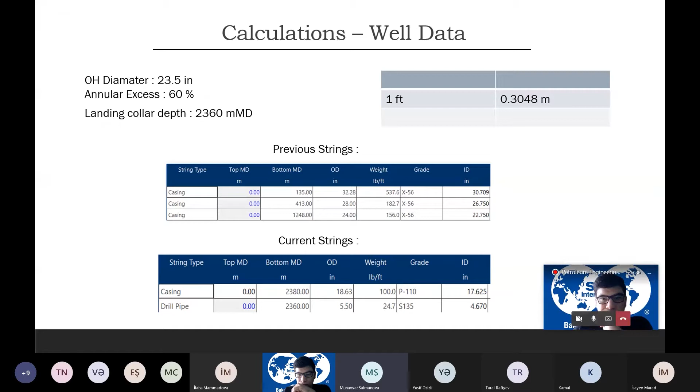Okay, then I will share my screen, and Wagif, please check if you see it when I write down here, because I need to switch cameras. Take a picture or a screenshot of the provided well data and this page, because I will share another hand calculation, and I want you to have both available. Let's see if you see my camera. Please check. I write 1, 2, 3. Did you see? It's in the right order, right? Yeah. Okay.

We have covered primary cementing, and I have chosen one of the actual primary cementing jobs that we have cemented and put the input data here. The objective of this job is cementing of the 18 5/8 inch casing with the inner string method, which I talked about in the last session. The first requirement is for the top of cement to be 200 meters above the previous shoe.

I have well schematics here, but I don't want to show them beforehand, because most of the time they will not provide you a schematic, and you need to take it from text and tables, whatever data has been provided. Requirement: spacer ahead 150 barrels and spacer behind 15 barrels. The questions: capacity of the 5.5 inch drill pipe. With the inner string method we have drill pipe inside the casing, and its size is provided, 5.5 inch.

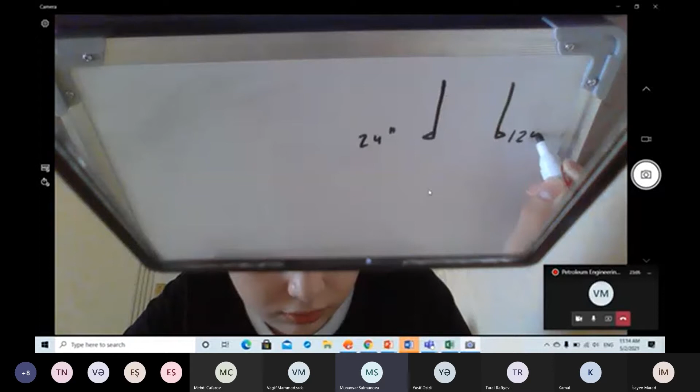Let's say it is 24-inch casing till surface. I will write down here 24-inch. This is the 24-inch shoe. What is the 24-inch shoe depth? We are always using MDs. So it is starting from top MD, 0 meter, to 1248 meter. So I will write down here 1248 meter. And then, what is my current string? My current string starts from surface to 2380 meter. I will draw it here.

I guess in our drilling engineering course in university, they asked us to draw this in the exam, as I remember, or we had some assignment tutorials where we were calculating this. And that was the only thing about cementing in university, as I remember.

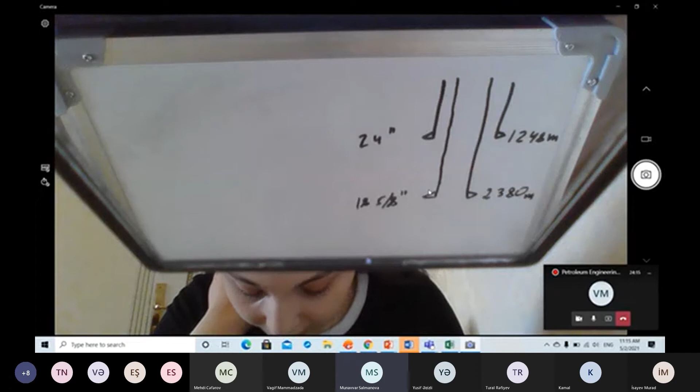2380. And size is 18 5/8 inch. What we have here is the inner string method. For the inner string method, we should have a drill pipe, and it is 5.5 inch. Where is the landing collar? We talked about these plugs and the inner string. We have the landing collars, we have a shoe, and we have already discussed it. That's why I will just directly draw it. Landing collar is 2360. It should be somewhere here.

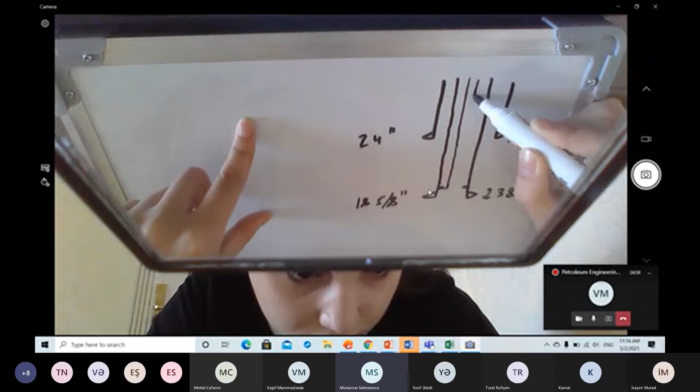What is the depth for my drill pipe? It is just above the landing collar, 2360 meter. I don't want it too big. Let's get it here, this part. It's 5.5 inch drill pipe.

What is our open hole? Open hole is the section which has been drilled and not cemented yet. So open hole will start from the previous casing. We don't care about this open hole because it was already cemented, right? Now we need to cement this section.

I haven't seen orange cement, but anyway.

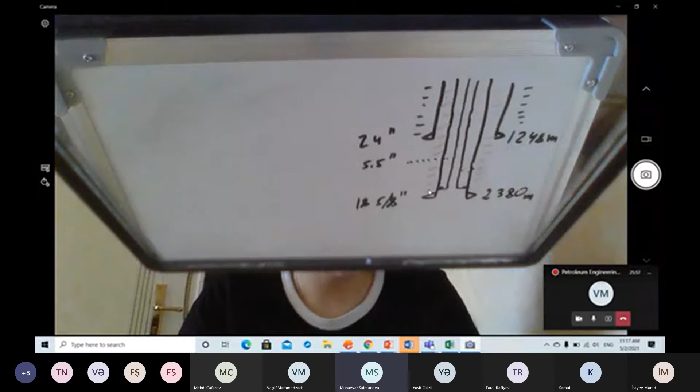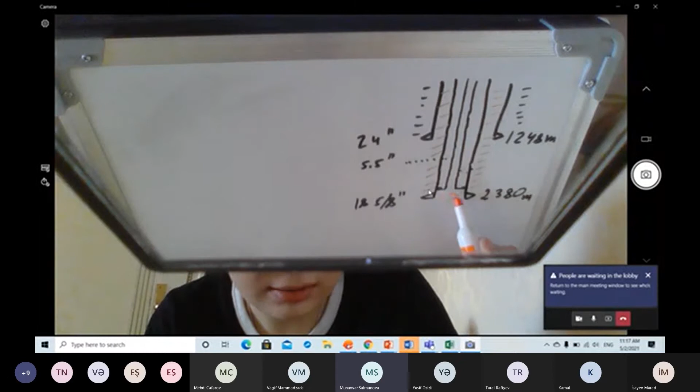So we will be cementing this part, because we want to isolate the open hole, and also we want to isolate some section of the annulus between the current string and previous string. And we will also have some cement slurry here in the shoe track. We could have some under-displacement, but I haven't put it in the requirements, so we will not have it in this section.

Now we start to calculate. Let's see what is required. We drew this sketch and we have everything here. Cement slurry will be here, and for the displacement fluid, let's say we will have a mud of any SG. Calculating pressures is not required in the table today. In the next sections, I will explain how to calculate the pressures at the end of the job and the differential pressure in the annulus.

I don't need to mention any mud weights or slurry weights this time because I will go for it after I explain slurry recipes and cement chemistry. We have spacer, mud, and slurry. Let's put a sign for them. This will be slurry. If I put cross, it will be spacer. And for mud, I can have something like this.

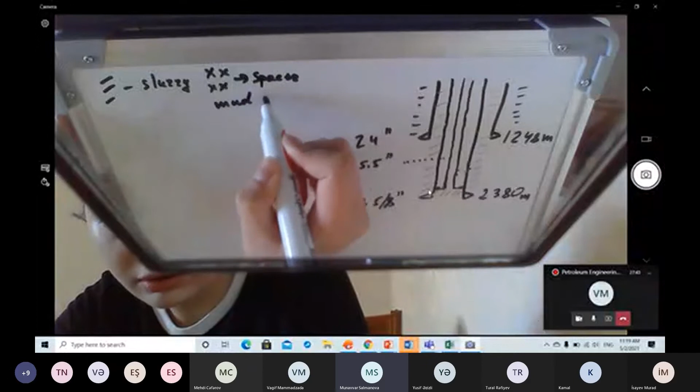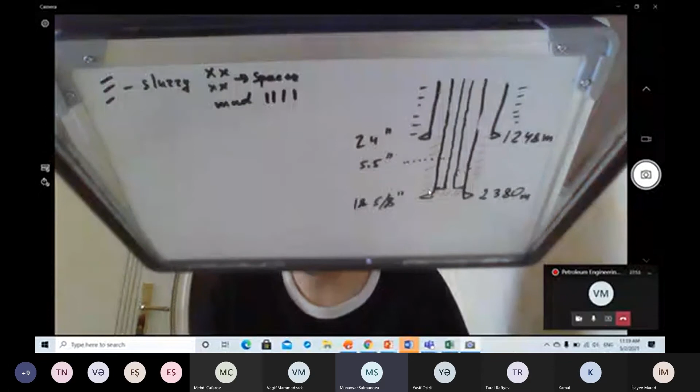So this part will be slurry, and I don't know where the top of cement is yet. What is the top of cement requirement? It will be 200 meters above the previous shoe. Where is the previous shoe? It is 1,248 meters, right? 200 meters above this will be 1,048. So we will have slurry till here, inside the previous casing. This will be top of cement, we write it as TOC, 1,048 meter MD.

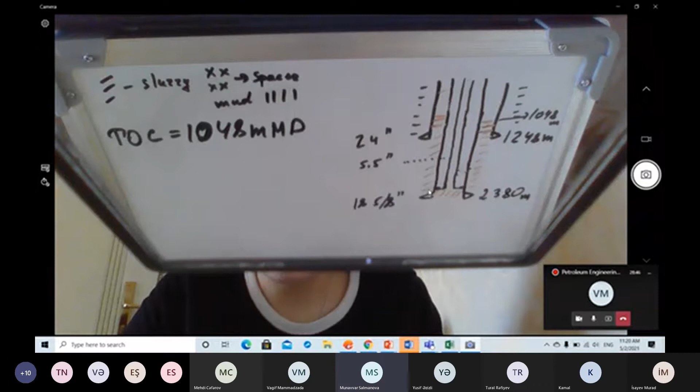Okay, let's start to calculate the capacities. First one, it is asking about the capacity. Capacity means how many barrels, how many cubic meters, what is the volume required to fill that annulus. It is asking about the capacity of 5.5 inch drill pipe.

So I have a 5.5 inch drill pipe. I have the parameters of the 5.5 inch drill pipe, and it is asking capacity, let's say C1, in barrels per feet. I will give you the formula for this in field units. If you want to calculate the capacity of any annulus, you need to go with that formula.

Capacity is equal to OD squared minus ID squared divided by 1029.4. This will give you barrels per feet if you are using OD and ID in inches. Then you will get this capacity in barrels per feet.

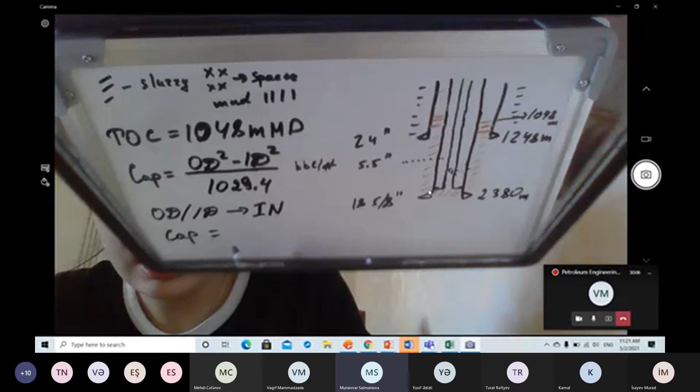Later on, when you want to calculate volume, if the length is provided in meters, you will need to convert it to feet and multiply it here to get volume. And capacity, let's calculate now.

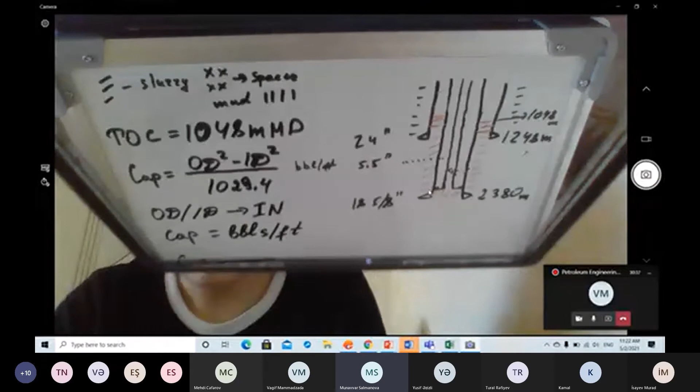We know that it will be C1, but drill pipe is not an annulus. It is a cylinder. So inside the cylinder, I want to calculate for 1 feet how much volume is required to fill it. That's why for this one I have OD, but I don't have another casing inside of this. That's why I will eliminate OD and use only ID for drill pipe capacity.

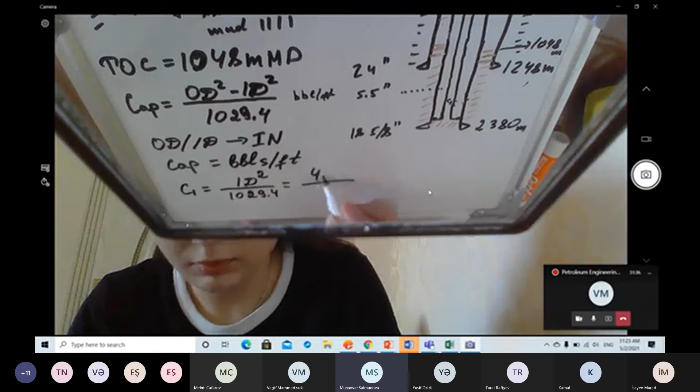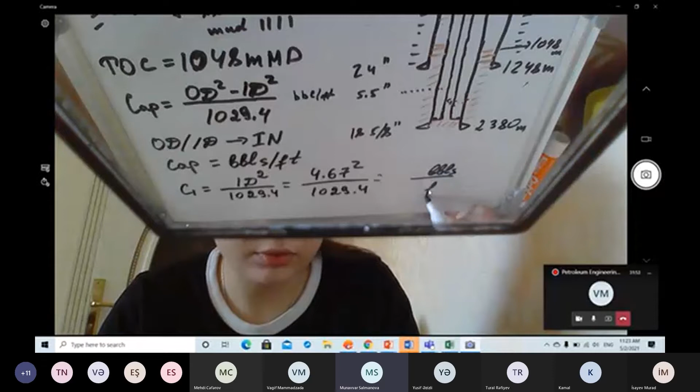Okay, let's see. So I don't need OD. I will use drill pipe ID squared divided by 1029.4. And what is the ID of that 5.5 inch drill pipe? It is given in the table I have provided. For 5.5, it is 4.67 squared. When we calculate it, it will be capacity in barrels per feet. Let me calculate it in Excel.

So it will give me 0.0... Yes, we got this value from calculating this. This will be the first answer. Let's write it down in the presentation as the first answer: 0.021186. So let's go for the second one.

Second, it is asking capacity between this casing and open hole. But for this one, I will need to explain what the annular capacity in open hole is with open hole excess or annular excess. So let's go back. I will delete all of this.

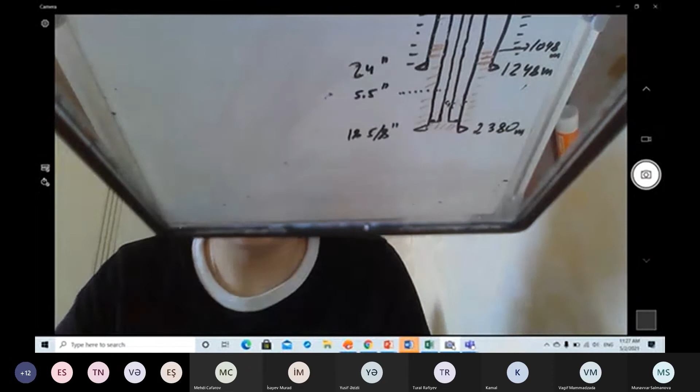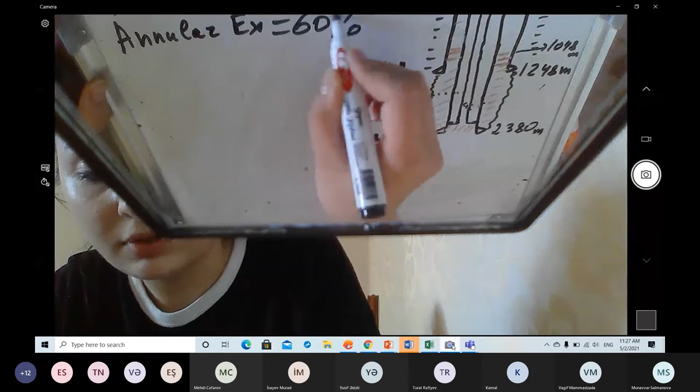Okay, we said we can calculate the capacity between annulus and open hole. Let's say open hole is here, and its size is 23.5 inch. But they have asked me for annular excess of 60%. Usually we use previous wells to get this data. In some wells we have a caliper, and from the caliper we get the average diameter and use it in new wells if there is no caliper.

But in reality, in the most important strings like production and just above production, or if there is any gas zone or water zone above that, operator companies usually run calipers, which give the exact diameter each meter, even every half meter or 20 centimeters. But now we are calculating beforehand without caliper data, so we will use 60% annular excess.

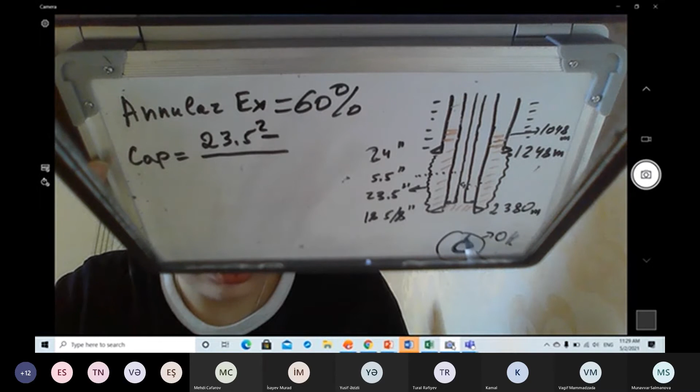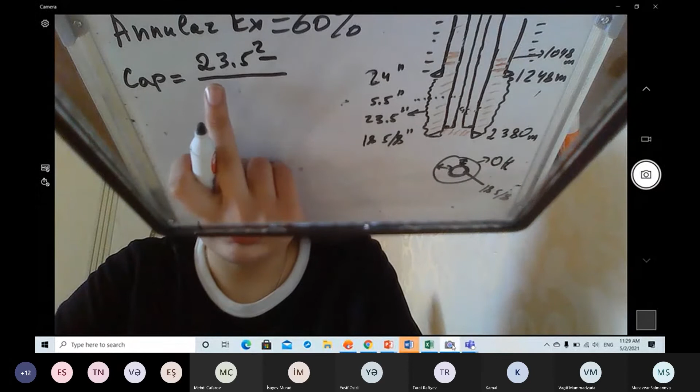For annular excess, we will first calculate the capacity, then apply the annular excess. Let's find capacity between casing and this open hole. Open hole size is 23.5 inch, minus the inner diameter, which is the outer diameter of the current casing, 18 5/8. So open hole diameter minus outer diameter of this casing gives the capacity of this section. That's why we eliminate from the open hole the OD of the current casing.

So 18.625, let's go and calculate this. If you have a calculator around, you can easily calculate and let me know. I'm sorry, it is not 23, it is 23.5. Okay. Yes, our next answer is 0.199494.

Okay, we go back for 24-inch and this one, but let me talk about annular excess. So now we calculate the annulus capacity for this section, right? Between our open hole and the current casing. And now we want to apply annular excess. What we will do, we will calculate the equivalent capacity.

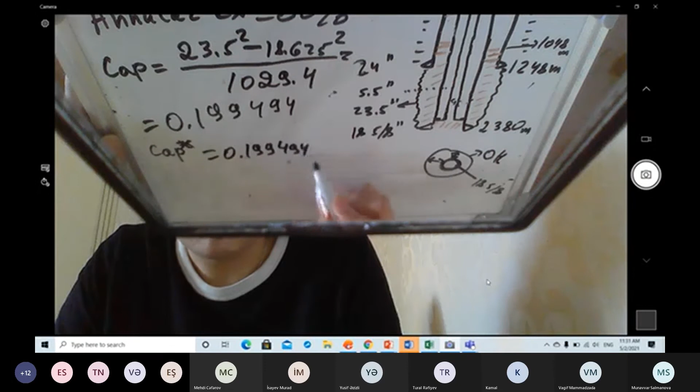How will it be? It will be capacity, let's have an asterisk here, and it will be this capacity, right, by 1.6. It will be 60% higher than this, and I will calculate it here.

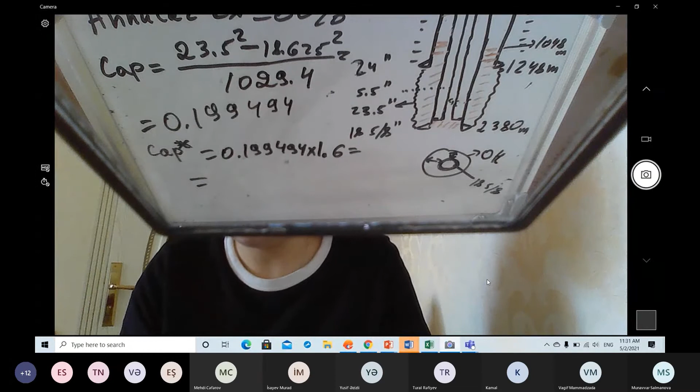Munavvar, I have a question. Yes. Salmanova. So why do you use inches and feet instead of meters? I'm working in a company where we are using field units. That's why I have used this one. But if you want, I can switch to metric units if it is easier for you.

In most international companies, we are using only field units, and sometimes they provide meters, because for depths the meter is very common. But for other stuff we are using field units, because in most cement units the acquisition systems are using barrels, and they are using inches. Inches are very common for string sizes.

I have seen in Russia they are using metric units, and in Azerbaijan in some of the old projects they are using millimeters for casing sizes. But in general, the very common one is inches for casing sizes, and barrels for the volumes. That's why. So this is the only reason I'm using it.

I can use a different conversion factor. This 1029.4 is coming from a conversion factor. When you calculate the cylinder, you can do the same for meters. I don't remember exactly the conversion factor, but we can calculate it here right now if you want.

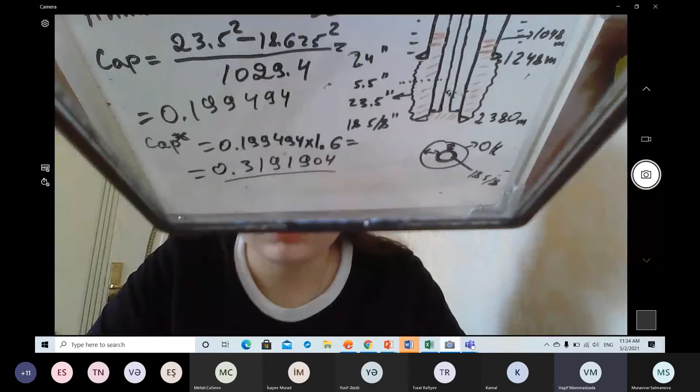And what is the next question? Guys, is it okay for you, these calculations? Do you have any question till here? It should be easy, I guess. Any question? Please unmute because I don't see messages right now. Yeah, I have my eye on the messages, so if anyone types in the chat, I will tell you. Perfect. Thank you. So I'm cleaning this board. Okay, then I will continue with the next question.

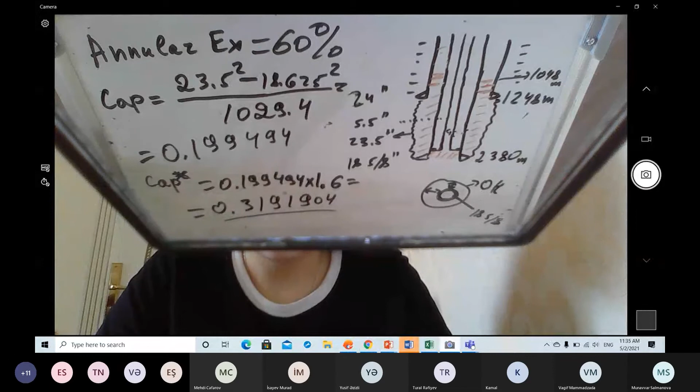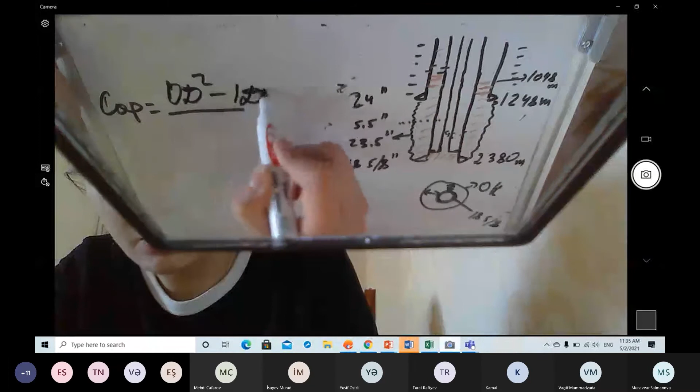Next question, I guess, is the capacity between this previous casing and this current string. Okay, so previous casing, now I will need to calculate capacity. In general we say OD squared minus ID, like the outer one minus the inner one.

I'm sorry, Munavvar Hanım. We have a question from Kamal, and he wants to know about the equivalent OH diameter. We have this in the next questions, I guess. Let me calculate this. After this, I will tell you the equivalent open hole diameter. It is the next question. Let's continue with this one because I already wrote this, and then we go back to equivalent diameter.

Okay, then capacity between the 24-inch casing and the 18-5/8 casing. In this section, we will use the inner diameter of 24-inch minus the outer diameter of 18-5/8. And what was the inner diameter there? I forgot. Let me check. Okay, from here. Inner diameter of 24-inch casing is 22.75 inch minus this one.

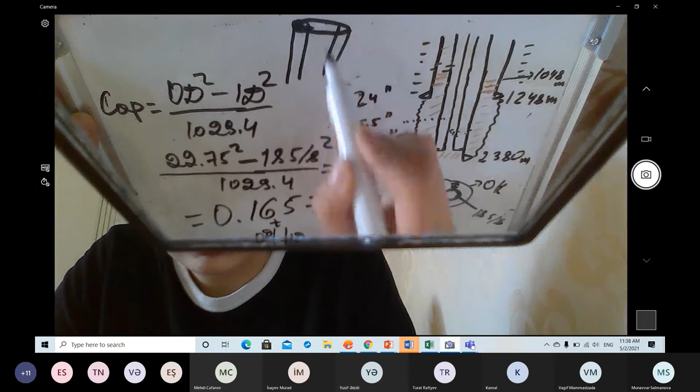Okay, so let's say it is your casing and it is OD and you are required to get ID. And this is, let's say, T thickness. Okay, sorry, you don't see I am writing, I wrote something here, but you didn't see. So let's say it is casing, right? Just one wall of the casing like this. This is your OD and you need to calculate what is your ID and thickness.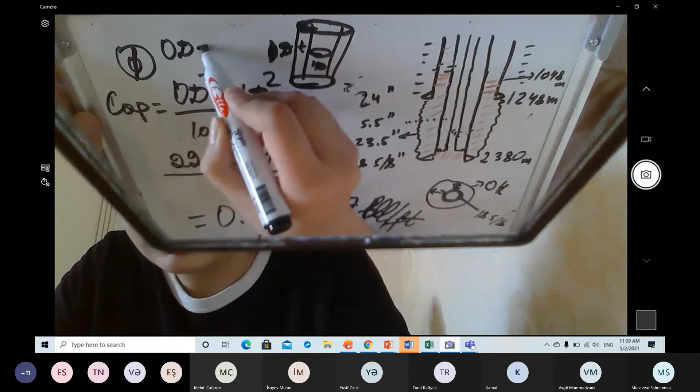Easy calculation, you need to have two of them to calculate one. Either the manufacturer should provide you OD or ID, or OD and thickness, or ID and the wall thickness. And how you calculate from this circle, you just have it as a diameter. So your OD minus 2 times the wall thickness, because you have this part and you have this part, right? 2 times the wall thickness will give you ID. Okay, thank you. Welcome.

So one of these three parameters should be provided, but the very accurate one you can get in the spec sheets. They provide the performance fluid capacity, and they are giving it in barrels per feet. And now we will do back calculation to get equivalent open hole diameter, and it is very similar to getting the capacity inner diameter of the string from performance data. In performance data, they will give you performance capacity because they fill it and they check how much it gets, because sometimes IDs and drift diameters are completely different stuff. That's why very accurate results you are getting from performance data, and you will need to do back calculation from this in the job.

That's what every time I do. I get the spec sheets. I calculate. I am doing back calculation. I get the ID that is equivalent to performance data, not the written one in the manufacturer data, because sometimes it is not very accurate. And now we are calculating equivalent open hole diameter. Did I write it somewhere? Yes, equivalent open hole diameter in inch. So we calculated the capacity between casing and the open hole is 0.199494 and

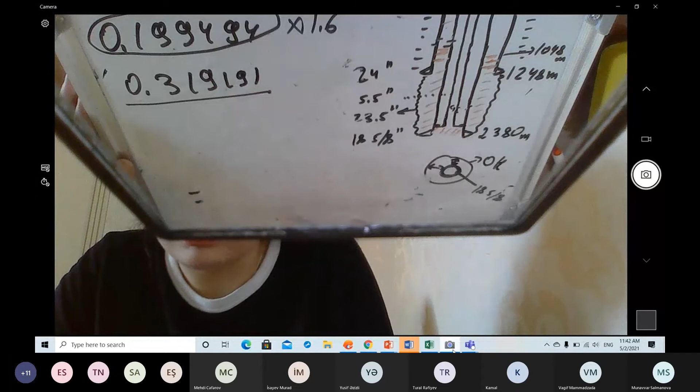Okay, guys. So we calculated the annular capacity between open hole and the casing is this one. And when I multiply it by 1.6, I got this value, right? This is now the current annulus capacity with 60% annular excess. Now I need to calculate the equivalent open hole diameter with this one. I will do back calculation. I have capacity, but I don't have any open hole diameter. 0.319191 is equal to equivalent diameter squared minus casing OD squared. So we just do back calculation and it will give us the equivalent open hole diameter.

Let's have it here. Let me do it in Excel, it is easier for me. Sorry, I don't know where I put my calculator, I couldn't find it. So I will multiply, this one is equal to this multiplied by, plus 18.625 inch squared. And then I will need this one under the square root. Okay, I got 25. So this ED, I calculated like this.

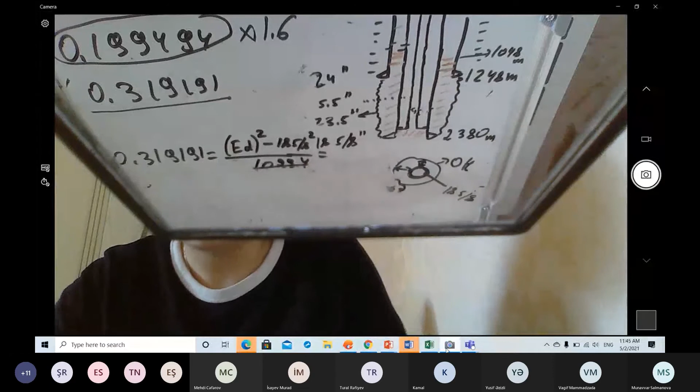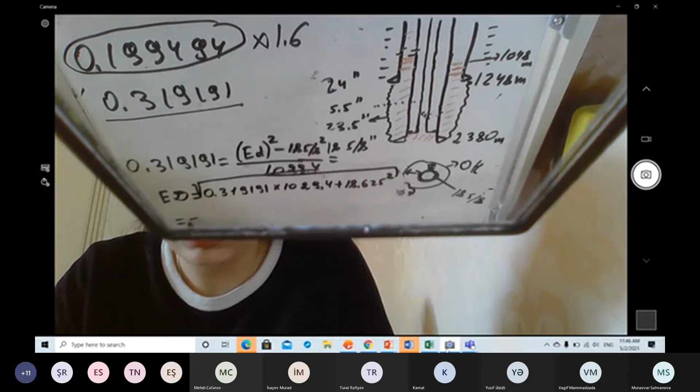So here, equivalent diameter, I got some value after calculation. So ED is equal to this one by, square root of this plus 18 5/8 squared. All are in the square root, sorry, very dirty. So just ED. Okay, this calculation will give us what ED is equal to. This will be our equivalent diameter, and I calculated it is 25.98972.

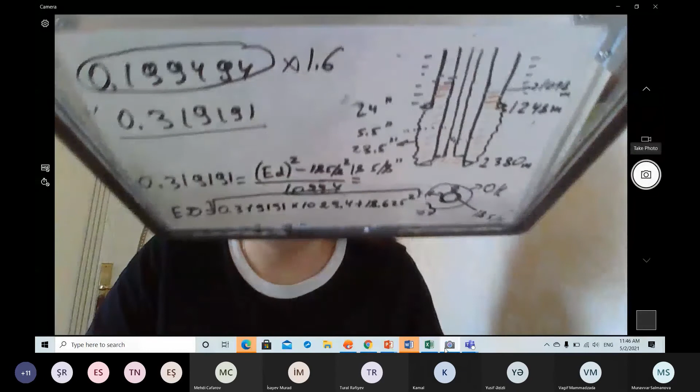Okay, so we calculated and got this value. Now we had 23.5 inch open hole diameter. We applied 60% annular excess, and we got around 26 inch. We got a higher open hole diameter, so that is a kind of safety factor, because while drilling you can get some washouts, you can get over gauge hole, and we are using open hole excess or annular excess to cover these washouts, so that we are not pumping less volume, just to keep the capacity full if we have any washout, because this is probably 23.5 inch open hole.

It comes from bit size, and we are drilling with a bit, but sometimes you get some washouts. There can be soft formation. In soft formations, when you get a lot of washouts, you are using higher excess. In surface casings, for example, usually we are using 100% excess, sometimes 150% excess, based on the data from offset wells.

In offset wells, once they run a caliper, they see that in one of the wells the mean caliper size is higher, two times higher than the bit size, and then in the next wells they use it as a tendency. So usually if you have offshore wells, very expensive wells, each time they run a caliper. But if it is a cheap land rig and they cannot go with a caliper every time, that's why usually clients and the operating companies are using the offset data from previous wells.

So now our equivalent diameter is 25.98, 25.9897. Okay, now we need to calculate slurry volume in barrels, and to calculate how much slurry we need, let me take this as a picture from here, because we have a question in the chat box.

So Salmanova asks, does it mean that the outer diameter extends? No, this is the open hole diameter. Let me see the question. This is the open hole diameter. It is not extended yet. We are getting a bigger open hole diameter in this case. Does it mean that the outer diameter extended? Yes, it is increasing, actually, in the well.

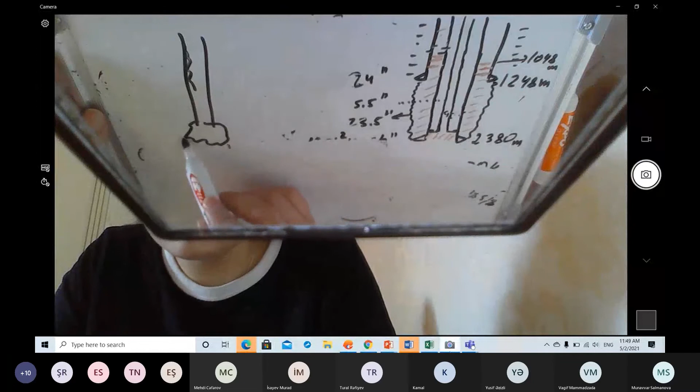Sometimes we get a caliper result, like the caliper shows something like that. Yes, sometimes we see something like this. Let me show you. So let's say here we have a formation, and this is a bit. You are going to drill, and this bit OD is 23.5 inch. In this case, you assume that this bit will drill a section with an open hole diameter of 23.5.

But in reality, you get some washouts like this, and sometimes it gets narrow and the formation collapses, not a big collapse, a very small collapse. And then you need to cover these open holes with some excess, because when you pump, the slurry will only cover the capacity of this bit size, and it will not cover these washouts. We call it washouts. So sometimes you can get a very over gauge hole like this. You see, this is the bit size, but you get these washouts here.

Sometimes you get an under gauge hole, like it looks like this. In some sections, the bit hasn't drilled to the required diameter. Maybe the bit was damaged, and the bit didn't drill with the required diameter. In that case, you get an under gauge hole, and in the under gauge hole you are okay, because you will get more slurry on the surface, and if you are ready to eliminate this environmentally safely from the surface, it's okay. If you pump more, that's good.

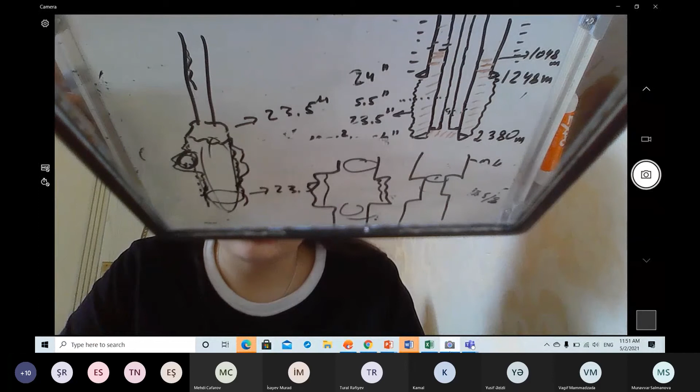But if you are pumping less slurry, then you will not get your top of cement at the required depth. And sometimes the top of cement is decided based on the zones, right? Water zone, shallow water zone, or shallow gas zone. And if you are not covering this zone, then you will be in big trouble because of safety in the well. I guess I answered that question, right? Is it clear now? The open hole diameter is increasing. What we are using is an increased, extended diameter, if you mean that one.

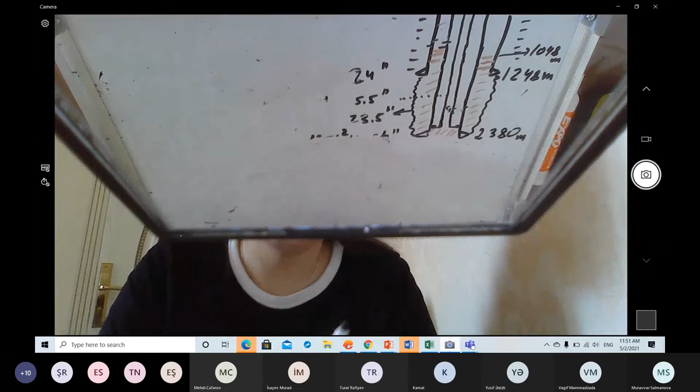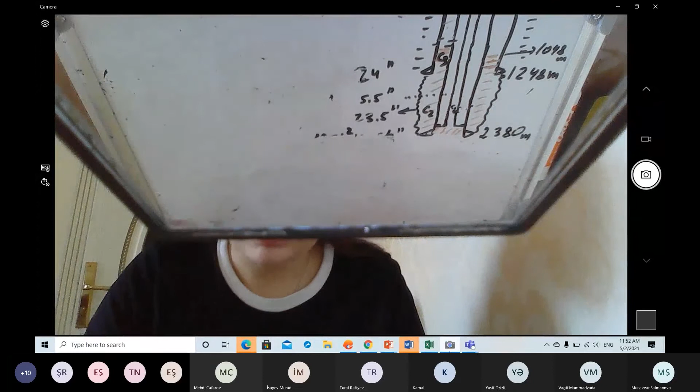So we calculated all of this, and now it's time to calculate slurry volume. Let's draw it one more time just with the capacities we need. We have calculated capacity C1, C2, and C3. And for volume, how do we calculate volume? We already have capacity, let's say a capacity between open hole and our current casing. I will calculate volume in stages, because the capacity here and here is not the same, right? That's why I will first calculate casing to casing volume.

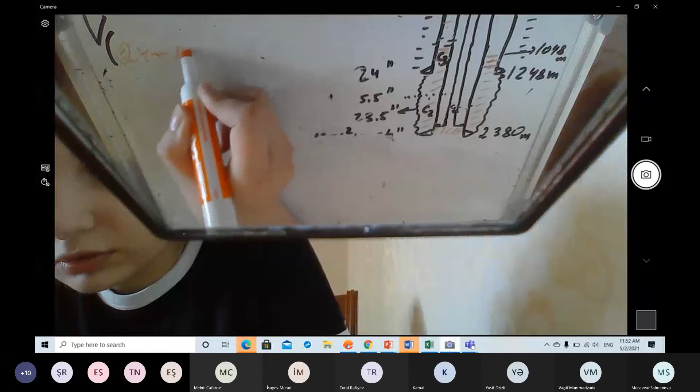Volume between, let's say, 18 5/8 to 24 inch. Okay, I need to calculate the volume between. I will have capacity by height. Call it height, depth, length, whatever you want. Let's call it length; usually it's called length. I know the capacity, it was C3. And what was my capacity here? Casing to casing capacity was this one. One more time.

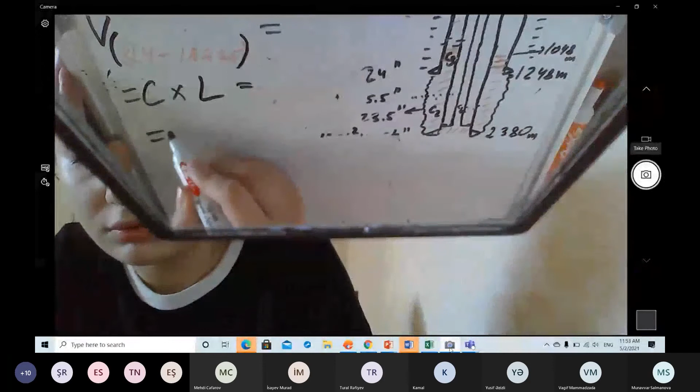What is L now? What was my top of cement? My top of cement was starting from 1,048 meter. And where is the previous shoe? It is 1,248 meter. So I need the difference. I know it is 200 meter, but if it is a different number, you will need to write it down and calculate. Sorry, it is in meters.

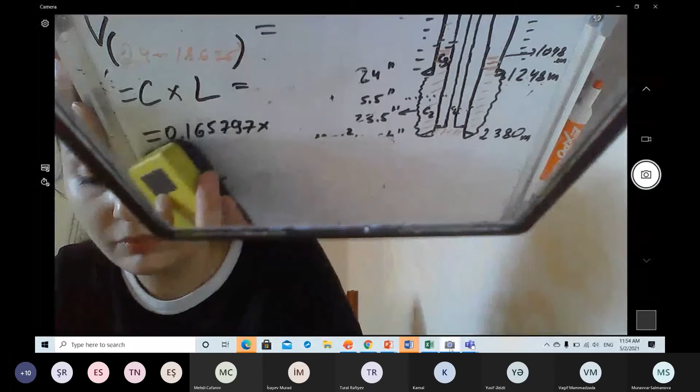Now we need to convert it to feet. And what is the conversion between feet and meter? So 1 feet, it should be... right? I have written it there. I guess I know this by heart. Yes, I'm right. So now we will convert these meters to feet.

Let's convert it. Yeah, do you have any question? Yeah, there is a question from Kamal. He wrote, Munavvar Hanım, the rathole volume is not included? Isn't the rathole volume included? Yeah, that's a good question. Let's go for that. I guess you are somewhat aware of these ratholes.

Usually each company has its own strategy and techniques in calculation, right? And in the company I'm working for, we are not considering the rathole. In university, when our professor taught this to us, they covered the rathole. In university, probably Heriot-Watt University, they are considering the rathole, and there is a reason why some companies don't consider rathole volume: when you are pumping, you have mud there. When you are cementing, you put your casing shoe and you have mud getting viscous below, right? The drilling fluid gets very viscous.

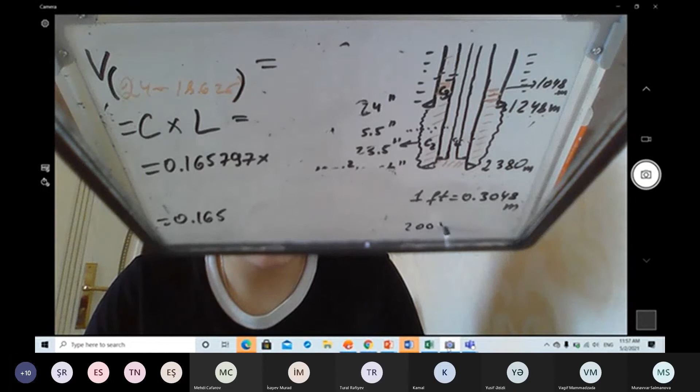Okay, then let's continue. Let's convert it to feet. We have a 200 meter length, and 200 meter by 0.3048. I will just calculate and write it down here. Sorry, I need to divide it, not multiply. 200 divided by 0.3048. So it will be about 656. Okay, let's write it down like this.

I just use this one, okay? Okay, I got this number. I don't know if you are also calculating there. If you are getting a different number, please let me know, because I'm using my phone. I couldn't find my calculator. That's why I can make mistakes easily.

So guys, we calculated the volume for this section, the capacity between casing and casing from top of cement to here for 200 meters. I converted 200 meters to feet. It gave me 656 feet, and I had capacity in barrels per foot. I multiplied it by feet and got it in barrels. So the volume between casing and casing is 108. Let me write it down here because in the end we will need to sum it.

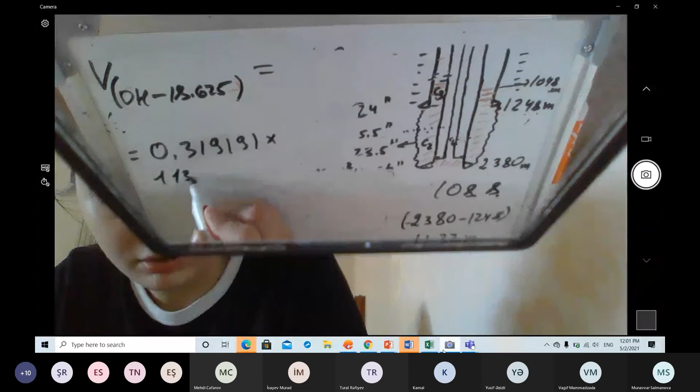What is that one? Okay, this one. So now we need to calculate the length again. It will start from the current shoe minus the previous shoe, and it will give us the length in meters. We will divide it to convert it to feet. So it will be, oops.

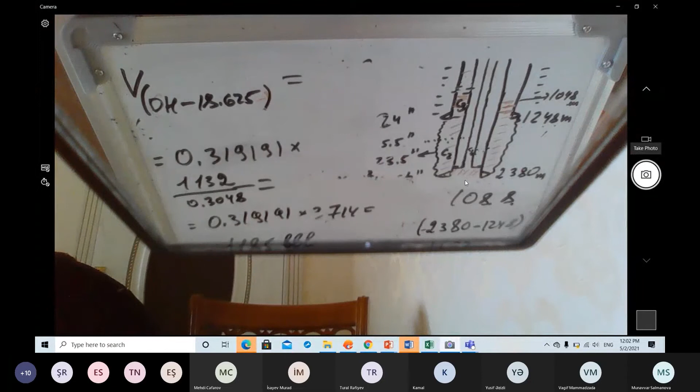Get my charger. Give me a second, guys, please. Now we are safe.

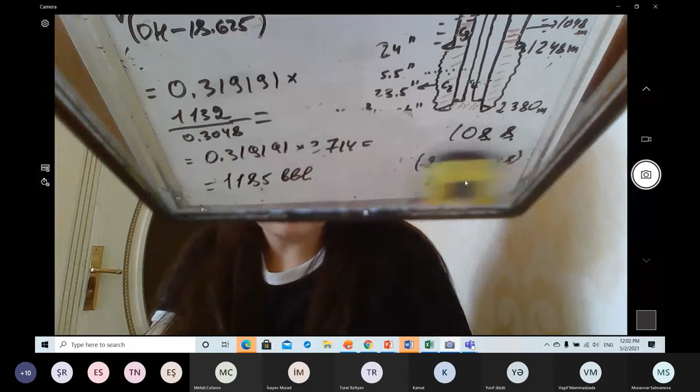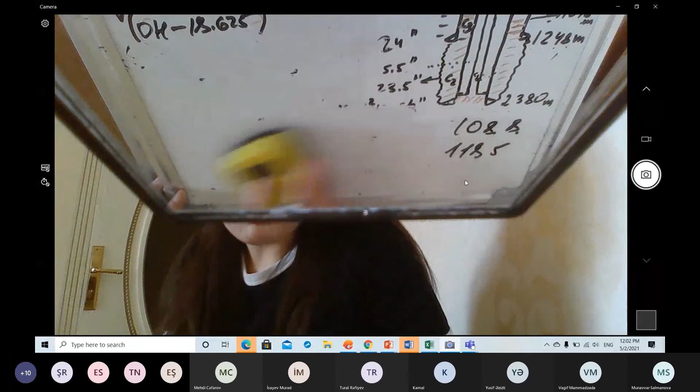Okay, I got 1,185 barrels. So this will be the second slurry volume we require. And then there is a last section for the shoe track, and I guess I didn't calculate the capacity for the shoe track. Let's calculate the capacity first for the shoe track. So capacity will be from the inside diameter of the current casing.

What was the inside diameter of the current casing? It was here. It is 17.625. So let me calculate capacity for 17.625 squared by

Okay, what is our shoe track length? So our landing collar was at, I guess, 2360. Okay, so I have only 20 meters. For this 20 meters, I'm just multiplying for volume. I multiply this capacity by 20 meters by the conversion factor. So I got here. So the shoe track volume will be this one.

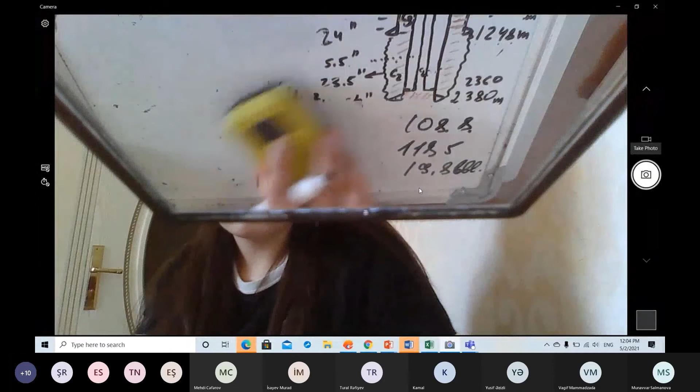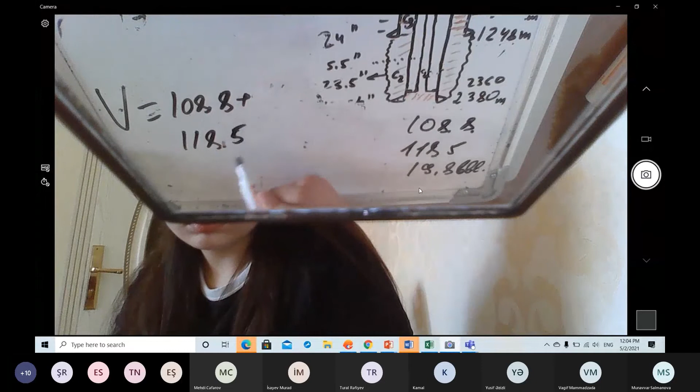And can someone answer my question? Why are we using the inner string method here? Last time we talked a lot about the inner string method. Why are we using the inner string method here? What is the favor of the inner string method here? Time for questions.

Inner string is used because the inside diameter of the casing is larger. That's why if we use the plug, it can get stuck there. Also, we need higher volumes to pump cement slurry inside the casing. Okay, yes, that is right. Otherwise we would require a lot of displacement volume, and you see, for now we are pumping 1,000 barrels of slurry. That is too much. Okay, guys, that is too much to pump.

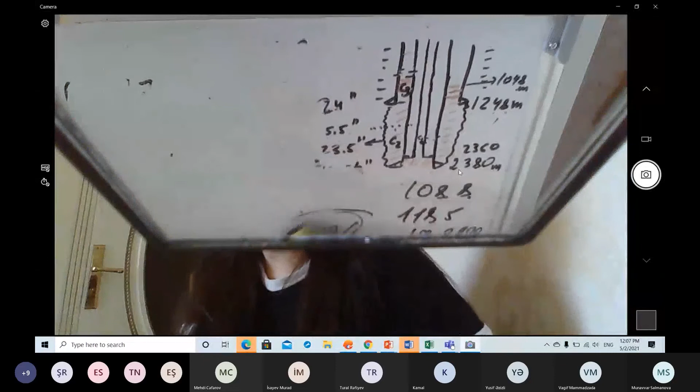We already have the capacity for the drill pipe, and we will use the capacity by height. So what is the length for the displacement? It will start from surface till here, the landing collar, where we want to keep some slurry below in the shoe. So it will be 2,360 meters, converting to feet, and we had the capacity.

When I'm using a notebook, I'm writing very well and very fast, but since my student times, I haven't written on the board, sorry. I know that I am writing in a very dirty style.

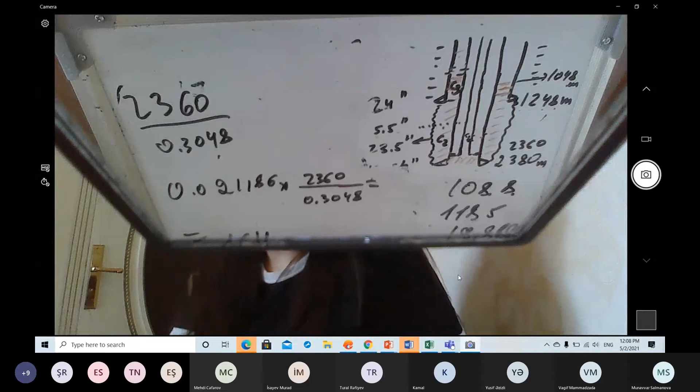0.021186 by 2,360 by 0.3048. It gave me 164 barrels. This is a very small volume for this kind of section.

But if you went with the inner diameter, we already calculated it for the shoe track. Did you see, only for 20 meters it gave me, I guess, 18 barrels or something like that, 20 barrels. It gave me 20 barrels for 20 meters. And we can have a rough calculation of 1 meter for 1 barrel.

If we used the whole string without the inner string, we would need to pump 2,360 barrels of displacement volume, and it is a lot. Okay, it is a lot. You wouldn't pump this, like you wouldn't have a slurry for this to pump, because it is very difficult to design this kind of slurry.

I guess I am explaining it very slowly because 1 hour already passed. That's why let's go to other questions very fast.

Okay, we calculate the displacement volume. I deleted what I have got. I guess it should be on my phone actually. Yes, it is 164 barrels. And length of spacer and shoe track volume. We calculated already shoe track volume. It is 19.8 barrel, and length and top of the spacer.

So what is the spacer volume we are pumping? Spacer volume we are pumping is 150 barrel. Now we will need to do back calculation. How we will do? We know where is the top of the cement, and above that we will have a spacer ahead, right? So we have a capacity for casing to casing.

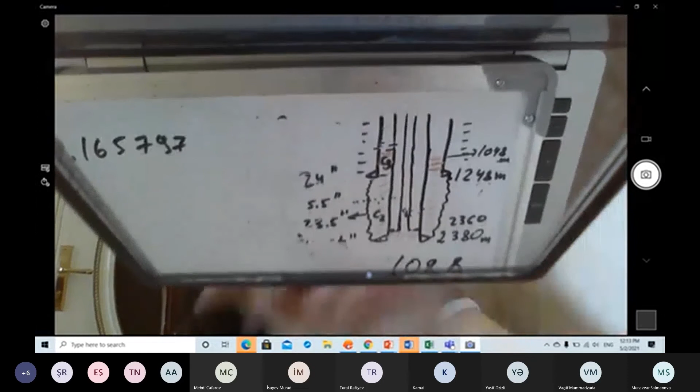Yes, now we were calculating the spacer volume. It's already provided, 150 barrel. And now we will do back calculation. So we need to get length. Now we have a volume, we have a capacity, but we don't have a length. So volume is 150 and capacity is this one. We need to find length. I will get it in feet, okay?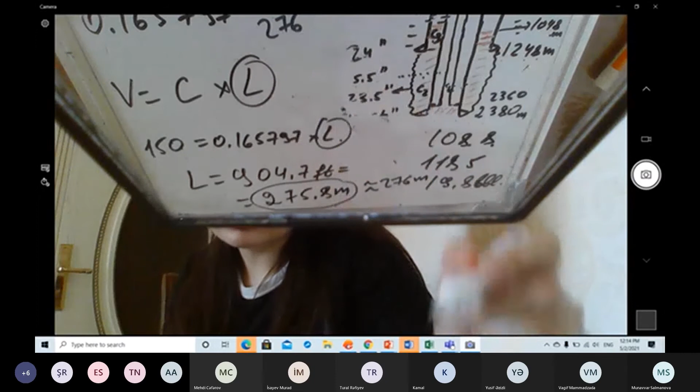150 divided by 0.165797. I got this in feet. Let's convert it to meter. It will give me 275.8 meter. Okay, you don't see my screen, I guess, right? Let's say roughly 276 meter of spacer. When I pump the 150, it will give me 276 meter above the slurry. And this 276 plus top of cement will give me top of spacer.

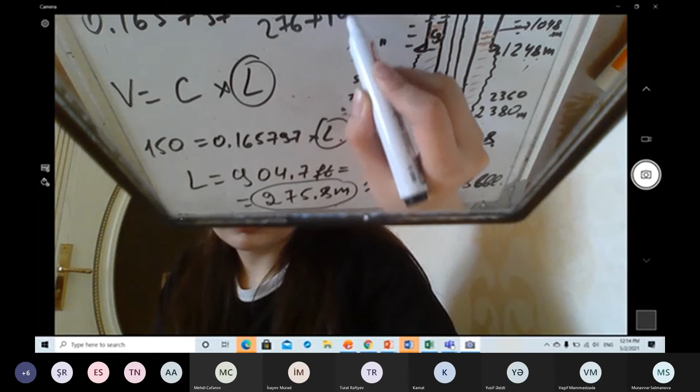Because you have top of cement, the top of slurry, so spacer length will define the top of spacer. So 276 plus, where is the top of cement? This one. Let's answer questions on screen. So our length is 276, let's say, and top is this one.

I guess now I don't need to write anything. I can go back to the share screen option. Okay, let me rejoin there. I will close this camera and then open the Teams camera. Do you see me right now? Yeah, it's okay. And you see my screen when I share, I guess. Yes, it's shared.

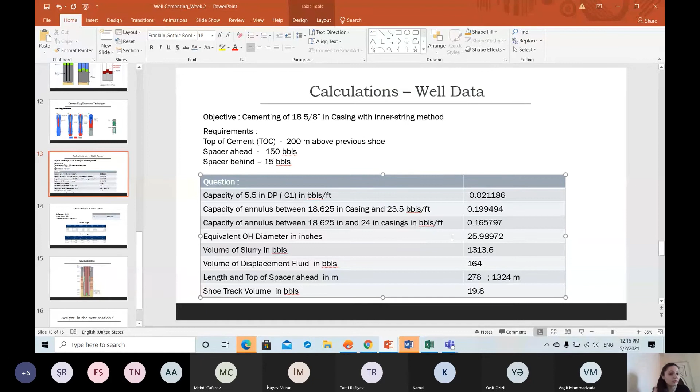Okay. We calculated all the stuff here: shoe track volume and the top of spacer, etc. And now we need to see the schematics to check if I have done it right. This is the schematics. I took it from our software; I inputted all this data.

For us, I don't know exactly, because I just wrote maybe 1 barrel, 2 barrel different here, so you shouldn't get the exact depths. This is the new well schematic that we drew, okay? We have an inner string, we have a slurry up to 1034 here, but I used only 200 meters above the previous shoe, so we use the 1048 meter.

So now we did all the calculations: displacement volume, slurry volume required, and the top of spacer. Where is that top of spacer? This one. Oh, sorry, I just made a mistake. I thought I was calculating top of cement from this. Okay, this will not be 1300. I need to eliminate it from this number, top of cement. I'm sorry, guys.

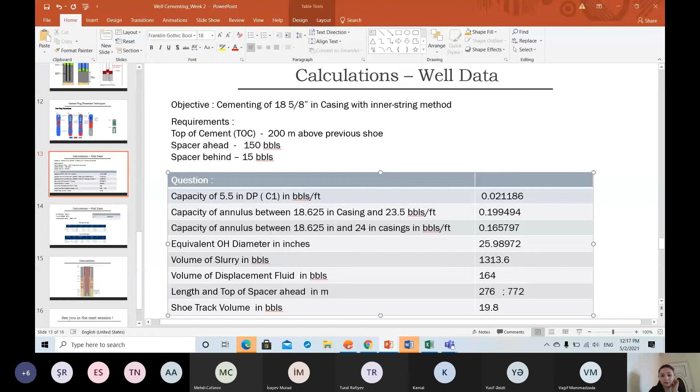I calculated 1048 minus 276, so it will be minus. I need to get top of spacer. Why didn't you correct me? So I need to have a top of spacer at 772 because it will be above that. Okay, so that's all for calculation. Now we can start, I guess, for plug. Any questions from these calculations, and then we can continue with a different topic.

So the well cementing calculations part we have done, and now we will go for remedial cementing. First of all, why do we need remedial cementing? We talked about primary cementing. In primary cementing, we had strings, and we were cementing the annular backside of those strings. Now we will talk about remedial cementing. It is used when you have any complications or problems in the well, and when you need to repair it.

You use remedial cementing techniques when you got a problem in primary cementing. Let's say you cemented the 18 5/8 casing, and you didn't get top of cement at the required depth. Now you need to perforate and squeeze some cement through the perforations into that zone. Or in the open hole you have lost circulation, and whatever you are pumping is getting lost to the thief zones, or lost circulation zones. Remedial cementing treats conditions arising after the wellbore has been constructed.

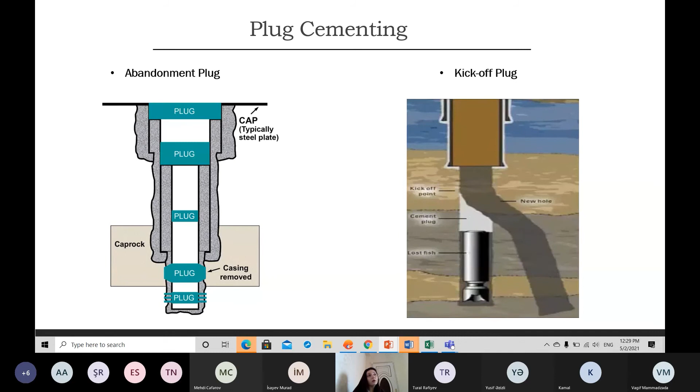And for sidetracking, I only mentioned fishing, but there can be different reasons. Sometimes, even before planning the well, 2 boreholes are planned. They go exploring 1 borehole, find a dry hole, then drill the sidetrack into another hole, or multilateral holes, etc. There are a lot of options, and for each sidetrack mostly cement plugs are used. Sometimes the first plug is not successful if you don't have a good base, that's why 2 or 3 kickoff plugs are sometimes spotted in the well.

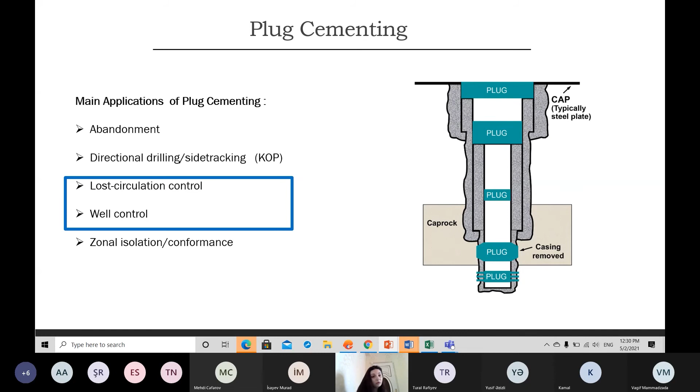The next types are lost circulation control and well control issues. Lost circulation is also very common. In a lost circulation case, during mud circulation you are getting all fluid lost to the formation. For a lost circulation plug, you need to know some formation details and the type of losses. If it is total losses, whatever you are pumping goes to the formation, the level in your well is reduced, and well security is not under control. That's why lost circulation cases are very important to be under control.

And if you have a fractured formation, you need to know if it is a drilling-induced fracture or a chemical-induced fracture. Maybe the mud is incompatible with your shale and you are getting fracturing in the shale. You need to change the mud type first before spotting cement. But cement is one of the good solutions for lost circulation, and with very soft formations it can also provide some strength to the formation if you squeeze some cement in.

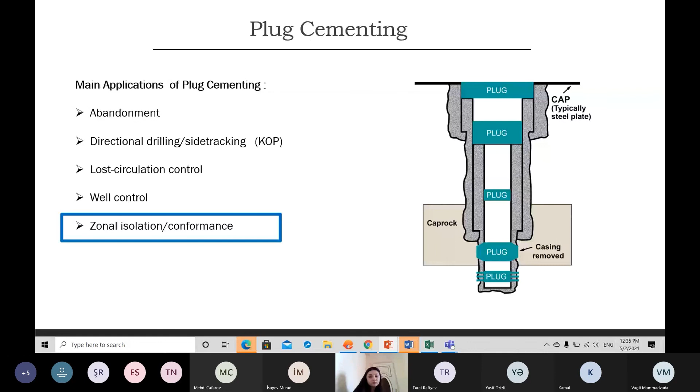Any questions on plug types, plug applications? Okay, there's no question in the chat box so far. Okay, then we go back to techniques.

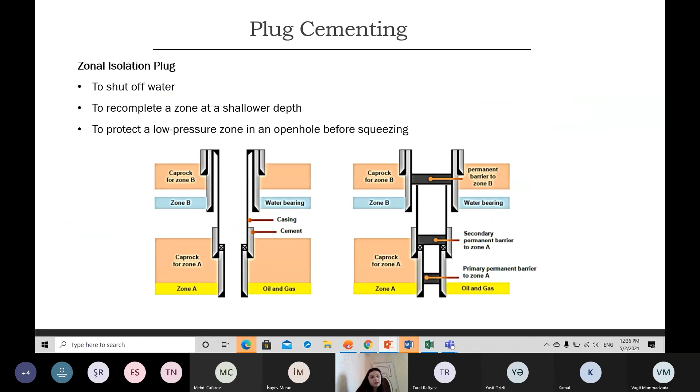So this was plug cementing and plug cementing applications where we are using plugs. And now I will talk about cement plug placement techniques. Three main cement plug techniques are used, but in most cases the balanced plug method is used. Dump bailer, balanced plug, and two-plug. Let's go one by one.

The dump bailer is very rarely used, and it is used only when you need to pump a few barrels. One dump bailer is around 3-4 barrels, I guess. It depends, there are a lot of types, but sometimes it is 5 barrels, 10 barrels maximum. And you are using a wireline to run this dump bailer. It is a kind of tool. You put the cement slurry inside and it goes down on wireline, and there are some electrical or mechanical opening systems used to open this tool, and this spots the plug there.

Why are we using dump bailer? Because we don't need to put a very big length for this plug, and if you pump this low volume for 300-400 meters through drill pipe, then you will get everything contaminated, and when it reaches 4,000 or 5,000 meters, you will not get any pure cement slurry portion there. That's why the dump bailer method is faster, but it has a risk that the dump bailer will get stuck or anything. These kinds of risks exist with the dump bailer.

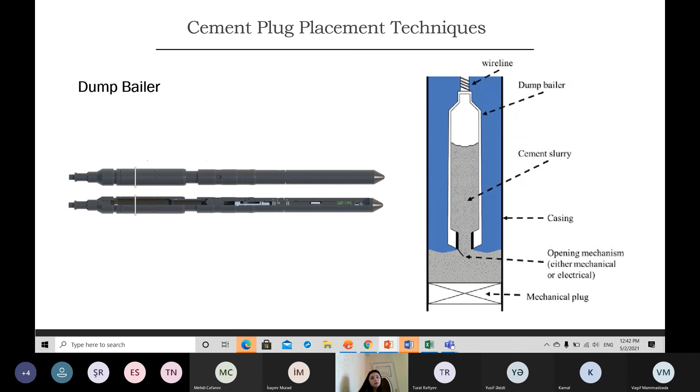The last one is also used. For this one, the main issue is the casing accessories, and we need to have a locator. It is the two plug technique. It is the same as what we use for casing cementing, right? We are using top plug and bottom plug. Here we use darts because the plug itself is bigger for drill pipe, and sometimes they call the darts plugs also. You can hear first wiper dart and then second wiper dart.

So this method is a little bit different from the balance plug because you are not immersing all the drill pipe inside. You will have only a few meters of this pipe in there. And why is it a favorable method? Also because you are getting less contamination. In the balance plug option, you will not be able to use any dart or any mechanical separator between slurry, but there is also a method here, foam balls. Sorry, I haven't put any photos here.

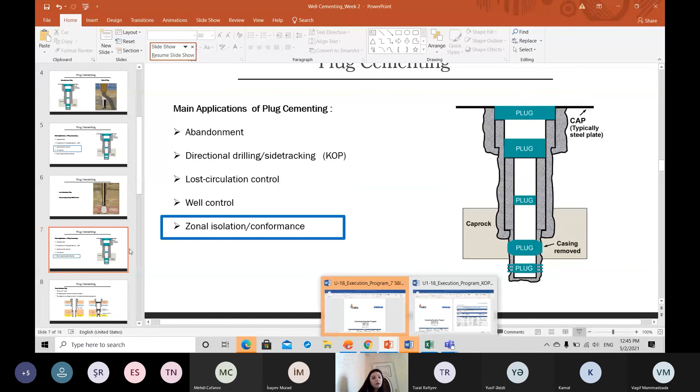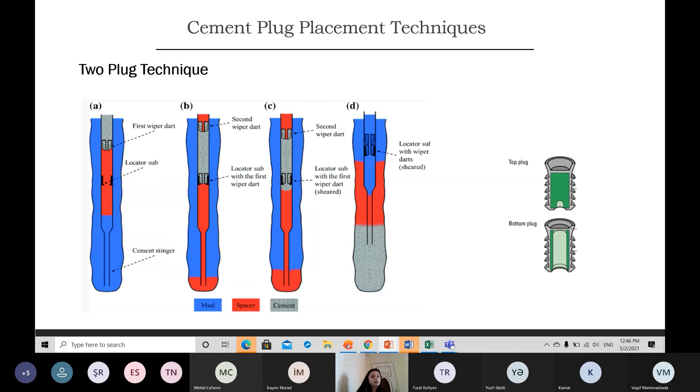So I guess I completed, and we have already covered the calculation section. So from my side, that's all I had. If you have any questions, I'm waiting. Guys, anyone having any question? Okay, so I guess no questions.